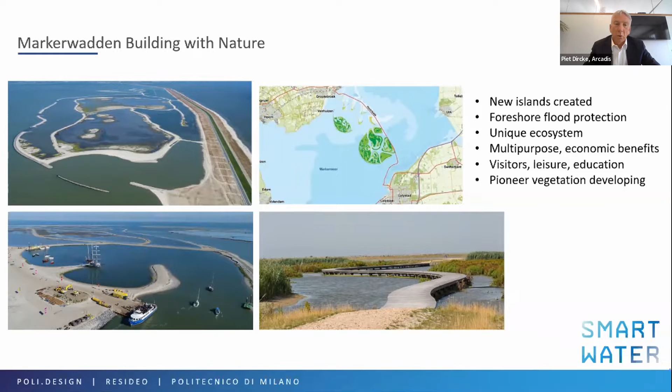There was lots of turbidity, a very poor ecosystem as a result, and that is now rapidly improving with these new islands. There are some fantastic movies on YouTube by filmmakers. Biologists and ecologists are really positive, seeing the pioneer vegetation and pioneer fauna coming up now, about 5 years after construction. As you see in the picture, there's also room for visitors, for leisure. There are Dutch educational programs, school classes are brought here. So there's a combination of nature development and leisure that works out very well for this building-with-nature project, as we call it.

So this is a nature-based solution. Another example I want to show is along the Dutch coastline. As the impact of sea level rise also impacts the Dutch, we had to reconsider our coastal flood protection. We found there are a number of weak spots along that western coastline that you see here.

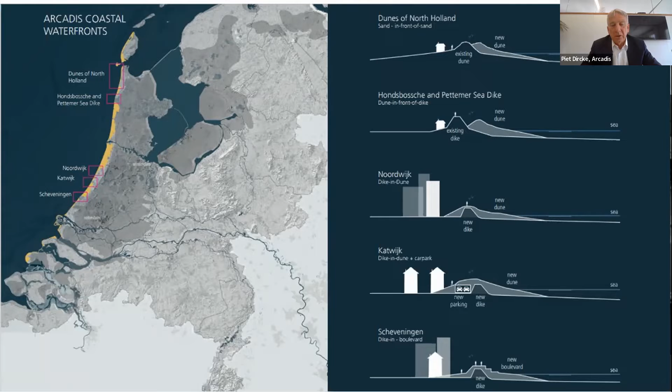The Dutch decided, in addition to the existing dike system, to come up with new types of solutions, not just raising the dikes, but adding softer solutions like dunes, and also adding new functionalities to those dikes. For instance, a boulevard in Scheveningen, the well-known tourist resort. But in the middle you see the city of Katwijk, which has the most spectacular addition, and that is a parking garage. You won't believe it, but it's really true.

This is a dike system that has a parking garage built underground, right adjacent to it. It's covered by a dune, and that dune also has a raised beach in front of it. The combination of all this results in a very natural landscape now that has really improved the quality of this beach resort. It's much more attractive.

There's more visitors coming, and on sunny days the extra bonus is they don't have to stand in a 2-hour traffic jam in front of the city, because of this enormously long and thin parking garage. They can drive into the village, go underground in the parking garage, take the stairs up to the beach, and walk to their beach resort. That's a multifunctional flood protection solution, combining nature-based elements and civil engineered solutions. And the best of it is it even generates cash revenues because the parking garage sells tickets.

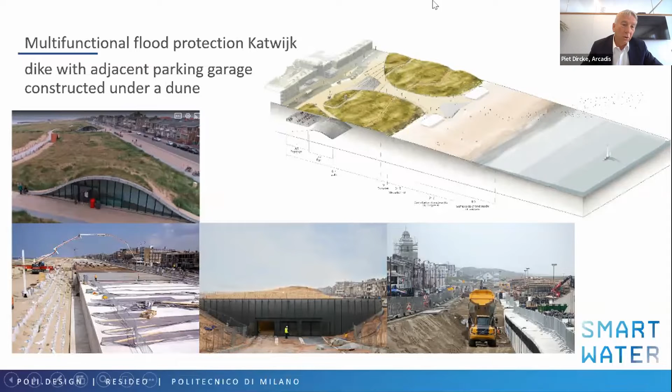It's a bit of a joke, but all around the world I tell the story that as far as I know, this is still the only dike in the world that actually earns money.

Just a step further, not so far from Katwijk, in the middle of Rotterdam, you find this sea dike. You won't believe it, but this is a primary flood protection, just like Katwijk. It has a parking garage and a park on top, a pedestrian zone. But this one goes a step further because it even includes a shopping mall on the side and a restaurant on top. In this dense urban environment, multifunctionality is key because this is very precious urban space, every square meter is valuable, and to make it feasible it really needs those additional functionalities.

On top of that it has another benefit. Usually dikes or flood walls are dividers, obstacles in our environment that separate neighborhoods from each other. Or like the example Fabio gave of New Orleans, they separate you from the river so you can't even see it anymore, you don't have that feeling of being in a delta city. Now this dike, as you see all these pedestrians walking, is not a separator, it's a connector, basically connecting communities. So there's a lot of extra advantages in that.

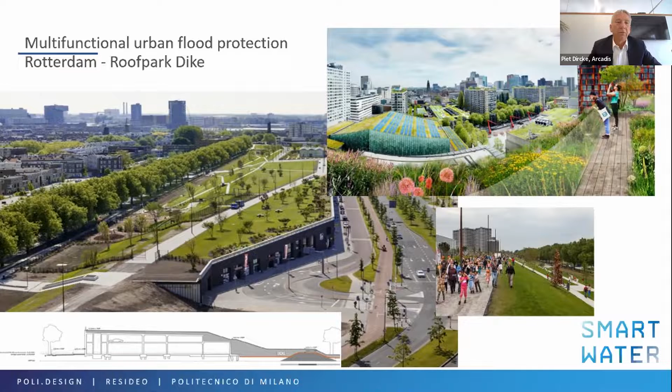Now, these are some best practices from the Netherlands. The challenge for us was to see how we can bring those good examples to other places where the challenges can be even bigger. I started in New York, where Hurricane Sandy created an enormous challenge in 2012, with some fatalities and a lot of area flooded. But the real big challenge, you see it in all these red flags, creating a new level of required urban resilience on our planet.

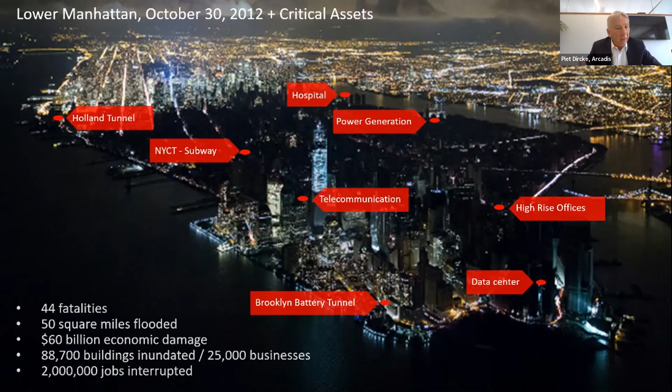These red flags represent critical assets and vital infrastructure: tunnels, bridges, power generation, data centers, telecommunications, but also the subway and hospitals. On all these red flags we're working right now to make these facilities more resilient. What we really need for our cities is, even if areas are flooded, to be certain that all our functionalities and critical assets are working, that we can pick up the phone and make a call, that we can go to the hospital if somebody is ill or wounded, that we can take the subway the day after the flood and go to work. That's what we're working on.

At the same time, New York realized it needed more than that - it also needed a more integrated type of solution in that dense urban fabric. So the idea of a design competition was developed, an idea that the Politecnico students and professionals would really love. It's called Rebuild by Design.

It was a competition that President Obama announced, implemented by Secretary Shaun Donovan, who appointed the Dutchman Henk Ovink to lead this Rebuild by Design competition. We were fortunate to be part of the Big U team with Bjarke Ingels and other partners, and be part of this iconic solution you see here - this yellow meandering line around the tip of Lower Manhattan, indicating we should look for solutions integrated in this dense urban fabric, that are landscaped and integrated into the environment. But at the same time, you see the straight lines.

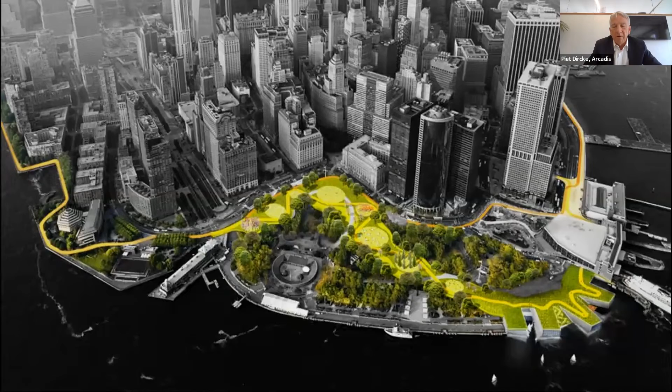Sometimes it also requires bold, practical, straightforward solutions because you have to deal with that dense urban environment. We've been part of that conceptual design phase, and we were fortunate and capable enough to take it to the next phase. I'm happy to show you two of these built images, something actually being done now in New York. 10 years after Sandy, we are building the so-called East Side Coastal Resiliency Project.

That's the lower east side of Manhattan, right underneath the bridges there. Multifunctional flood protection again, with a very strong community-driven approach, where reconnecting the community to the waterfront is key. So taking out a lot of the flood walls, but also dealing with the challenge of the FDR, the highway that runs along the waterfront and cuts off the neighborhoods from the waterfront. This is a very multifunctional solution that has been created here. It's right now under construction.

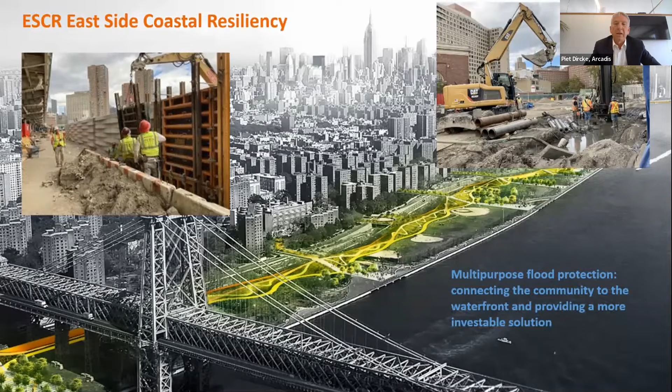The next phase is even more challenging. We are now in the planning phase of that, and this is really top of the bill. This is called Financial District and Seaport. And you can imagine what that means. Financial district means Wall Street. So this is the Wall Street area, very, very densely built with high-rise skyscrapers. And right next to that, the FDR, the highway.

Now, the plan here is that we find multifunctional solutions like the artist impression that you see here, soft solutions. But there is simply not enough space for that. The FDR is too close to the waterfront. In this case, we are negotiating and assessing the possibility of slightly going into the water here, into the East River, without impacting the ecosystem too much, and also without too much impact on the hydrodynamics of the system, because this is a tidal flow area here, to allow us to have a few more extra meters along the waterfront to develop these multifunctional solutions. Otherwise, we would simply not be able to come up with these solutions.

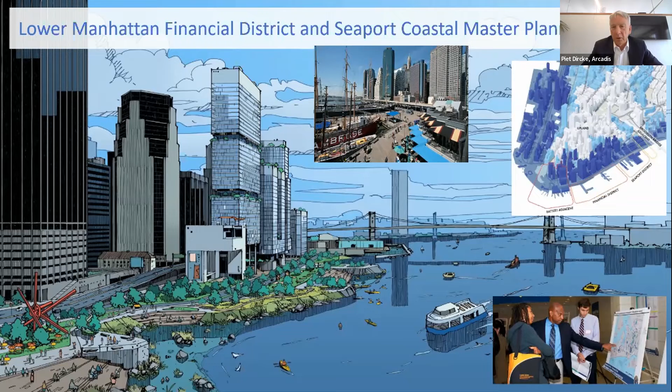One of the possible ideas that is on the table right now is also to consider whether or not it would be possible to take the whole FDR out. And that would be a giant jump forward. But given the traffic density right now, and knowing how fond the Americans are of their cars, that will be a big challenge. But New York is really thinking in that direction of maybe taking the FDR out here at the tip of Lower Manhattan.

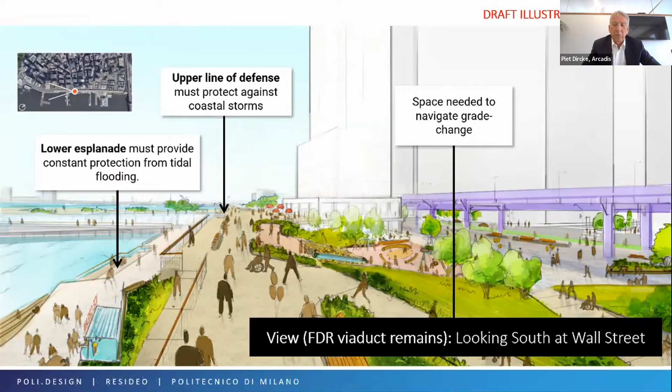I can only show artist impressions here because this project is now full in swing. We're now working on the master plan. And so these were just a few examples.

I want to finish with two big and well-known examples where I explicitly want to mention, yes, resilience can pay off. We don't always see those benefits. We all know there are benefits in investing in resilience because you avoid a future flood, but also because when people know that you avoid a flood in an area, values go up, real estate values, land values go up. You also know that investing in climate resilience in our cities, you also create a better ecosystem.

Just imagine green roofs or more parks. You also invest in the fact that you have a more healthy urban population and you create more quality of life for the citizens. These are all things that create value, but still that doesn't always convince, that never convinces those that have to invest the billions that come with these big flood protection measures.

Fortunately, every now and then we see examples that say, hey, yes, now we see. The one example you see here is what has been part of my life for the last 15 years. That's the flood protection system, the hurricane risk reduction system of New Orleans. Fabio also already talked about New Orleans here.

This shield, this ring of steel and concrete, it's not very nature-based, but it was very rapidly built after the hurricane, because the city was completely unprotected at that time. What was built around the city was $14.5 billion US spent in 5 years' time.

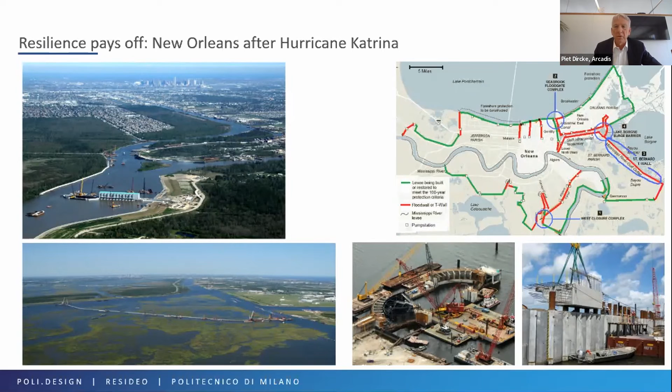And New Orleans really can say now that in those, let's say, 5 years of investment, 2007 to 2012, 10 years later now, they have a 100% return on investment on that $14.5 billion. So for New Orleans, definitely resilience paid off.

And another one where it paid off was in that same summer. So although the summer showed us the impact of climate change, an alarm bell that showed us there's no way we can longer suggest that climate change may be just a probability. No, but that same summer also showed us that we can do something about it.

I showed you New Orleans, coastal resilience. Here you see one in the river resilience. The Netherlands has been investing enormously in flood management for the river system after major floods in '93 and '95.

So it took us over 25 years to build this system. You see all the red dots in that big river system, Rhine, Meuse, and in particular the red dots on the top left side along the river Meuse.

Those were the ones that really made the difference when, as we all know, Europe was impacted by gigantic rainfall, torrential rainfall on the Limburg part, the southern part of the Netherlands, but also the parts of the Eifel in Germany and in Belgium, as well as in the Ardennes. So our neighbor countries really got a full hit here.

Fortunately, the works that were developed along the river Meuse, they held, they worked very well. I recognize that the Netherlands was not as hard hit as Belgium and Germany, but still, we didn't have even a single casualty. We had our major damage outside the Meuse River, in the city of Valkenburg, which was not part of the system. But this system here, and you see how nature-based these river widening solutions are, they really held.

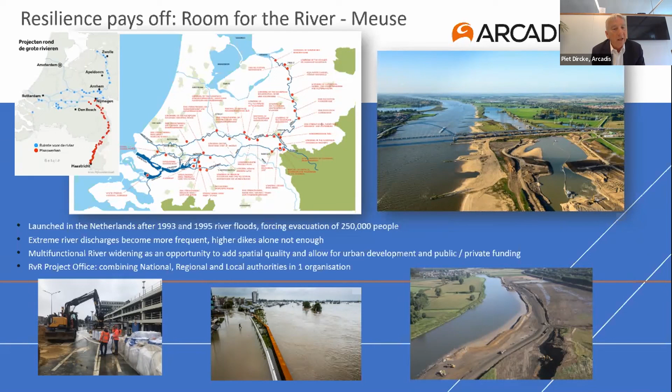So also in this case, the Dutch learned that resilience paid off. You see here the city of Roermond, an aerial photograph from one of our engineers. It was critical, but also here, the Dutch can say this was a bit of a smaller investment, but still around 2 billion euros were spent. And we had to wait 15 years to see if the system really worked. Fortunately, we can conclude that it did.

So fully recognize the impacts of climate change and the big risks that we are facing, and the future that will bring many challenges. Fortunately, I also still believe there is some hope, that there are things that we can do to make our cities and our citizens resilient against the impact of climate change.